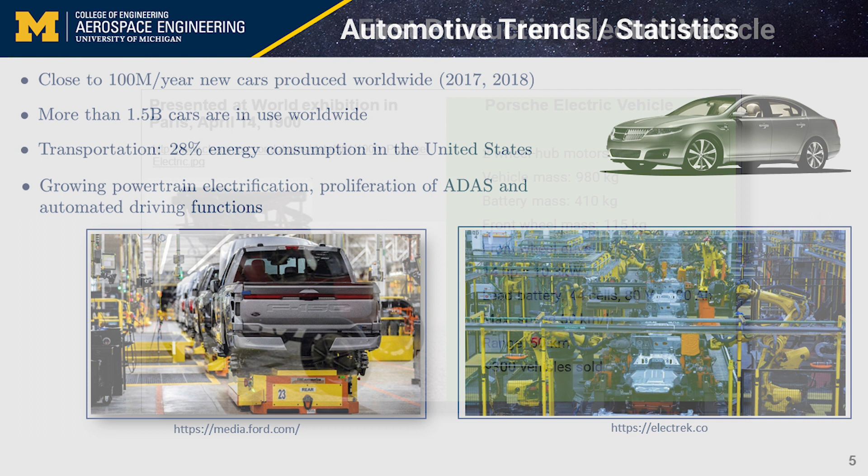And some of the trends are growing powertrain electrification, a move towards more electric vehicles, proliferation of ADAS, advanced driver assistance systems, and automated driving functions. And these photos show the Ford Lightning, which has a fully electric powertrain, being produced. So clearly, one of the trends has been towards

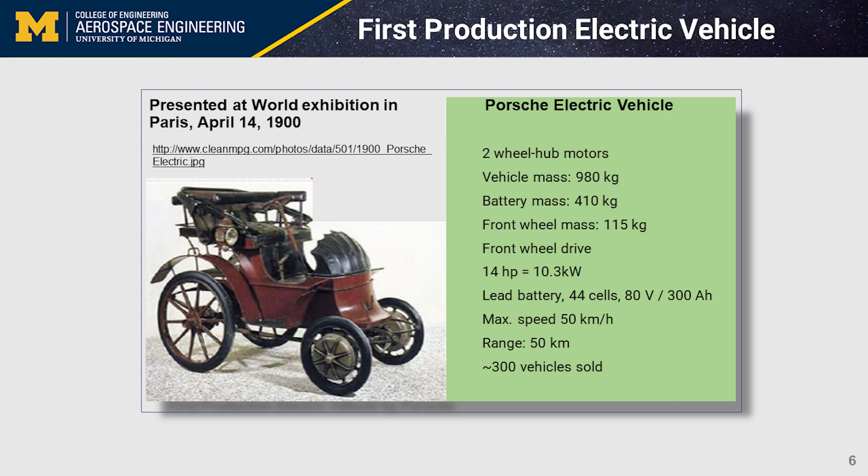electric vehicles, but what we see currently on the market is not the first electric vehicle, and in fact, the first production program goes back to somewhere around 1900 by Porsche, and that vehicle had a lead-acid battery and a fairly reasonable operating range of 50 kilometers for that time.

Now, if we fast forward more towards the present time, another notable attempt was in the 90s, and there was EV1, Electric Vehicle 1, by General Motors, and it had 170 kilometers range with nickel metal hydride batteries, which was pretty good for that time.

But as far as the product itself, it was pulled off the market, primarily because there was no customer acceptance at the time. People were not buying electric vehicles at the time, and of course that started to change more recently. And of course we recognize Tesla, but other manufacturers as well. And currently, perhaps about 10% or so of new vehicle sales would be electric vehicles.

So this is one of the Ford products, Ford Mach-E, and that has a 640 kilometers range with lithium-ion batteries. But what's also different about it, besides batteries, is that if you look closely, there is a 15.5-inch touchscreen, which is nice to have. But more importantly, there is a cloud-connected navigation.

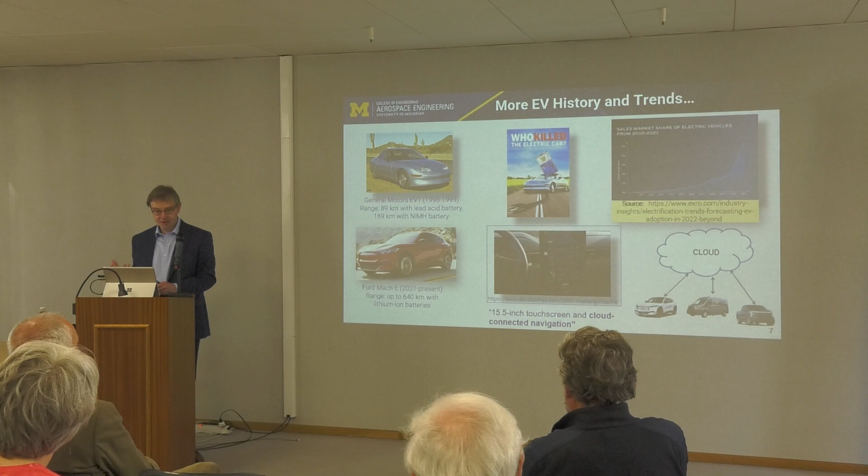And so Ford electric vehicles are all connected to the cloud. So these are connected vehicles. And the point that I'll try to make is that makes a fundamental difference in the general public being able to accept such vehicles.

So one of the key issues in accepting electric vehicles is the so-called range anxiety. About 40% of customers are concerned about electric vehicle range. Basically, the car can run out of charge in the middle of the road, because the density of charging stations is not high at the moment, but also charging takes time, so that's a concern.

Furthermore, some of the stations can have issues, for example, blocked or broken chargers, and if you look at driving in cold weather conditions, which happens in Michigan, for instance, the range can be reduced quite a bit. For example, by 30% in the case of Mach-E.

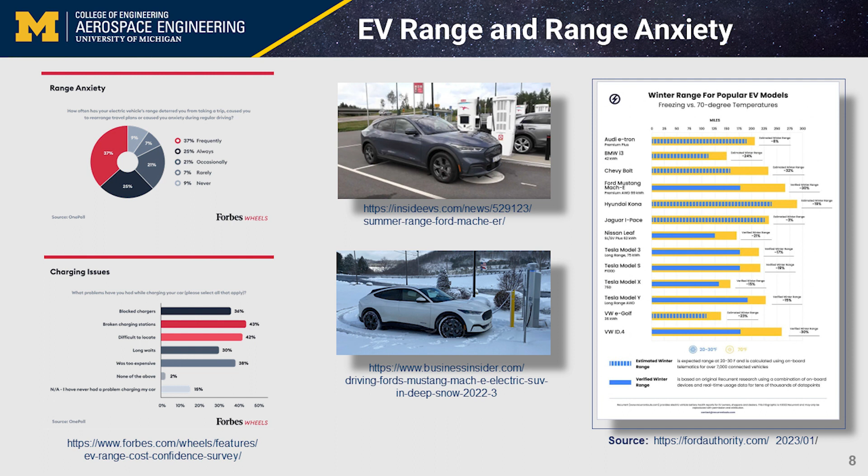So this is a type of application where cloud connectivity and generally being aware of information is really a technology that enables these vehicles. What happens is that you can learn energy consumption models for individual vehicles on the cloud, estimate and predict the range to alleviate customer range anxiety, provide range extension advisory, as well as provide routing and recharging advisory.

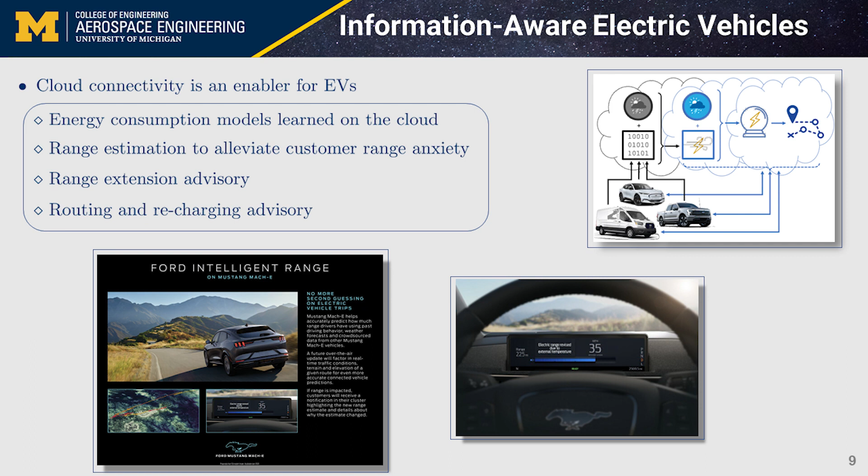And Ford is working on a number of features, such as Ford Intelligent Range, that implement this type of functionality. So our picture basically changes. If before we had an individual vehicle, and we were confined to this vehicle, now the vehicle is just a node in a larger information architecture.

We have a cloud. The cloud can have access to traffic data, weather data, as well as driving data. In principle, there is an unlimited computational resource on the cloud that you can use for model identification, optimization of energy management and eco routing, and even develop a bank of control policies that are specific to a given driving location, for example, high altitude versus normal altitude, and have those policies available on demand.

So now I'd like to say a little bit about some of the work by my students and collaborators in this area, how we try to explore the connectivity and the information available through such connectivity to enable new vehicle functions. So this is something that we call cooperative road anomaly detection.

And if you have been to Michigan, you know that the roads in Michigan have quite a few potholes. Part of it is winter and other reasons. But you see potholes like this. There are quite a few of them. And using vehicle sensors, one of the things you can do is build a detector that detects whether you hit the pothole or not.

And this particular detector is an estimator. It turns out that we don't just use something like a Kalman filter, which is more or less standard in these applications, but we use something called a jump diffusion process estimator, where the road input is represented as a sum of a Wiener process and a Poisson process.

And Poisson process in probability theory, it's something that's quite effective in modeling rare but important events, such as hitting the potholes. And using the jump diffusion estimation provides better estimation accuracy in being able to detect the potholes. So now we have these vehicles driving around and they hit the potholes.

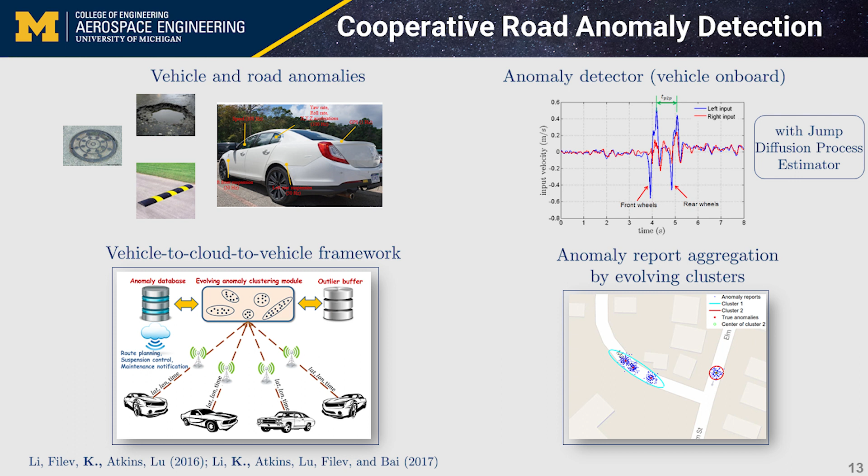And as the potholes can be repaired and disappear, once you start not receiving the reports, the weights of some of these clusters become smaller and they eventually disappear. So it's really a model where we treat the potholes by these evolving clusters as we receive the data.

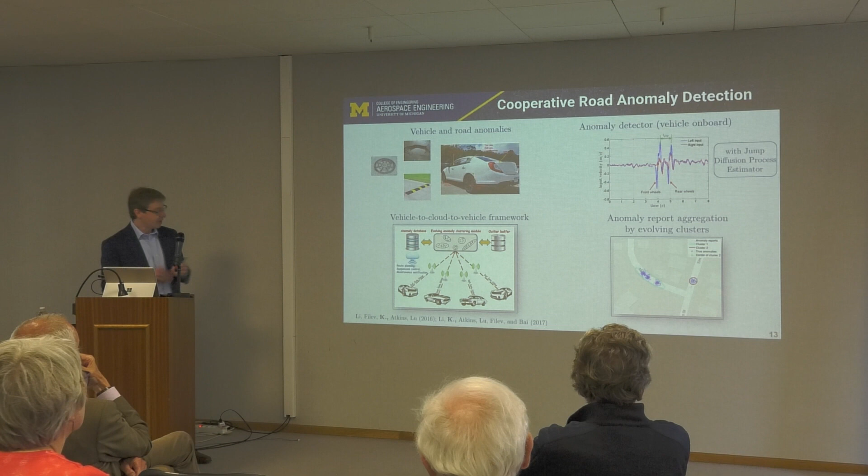Now, once you're able to learn this road anomaly information, you can convert them into route planning systems. For instance, you might say that, well, I don't want to drive along the roads with many potholes. I'd like to have a more comfortable ride. So I could create a cost function that weighs the time of travel, perhaps the energy or fuel consumption, and then the comfort index. And you can optimize this to decide on the route to follow.

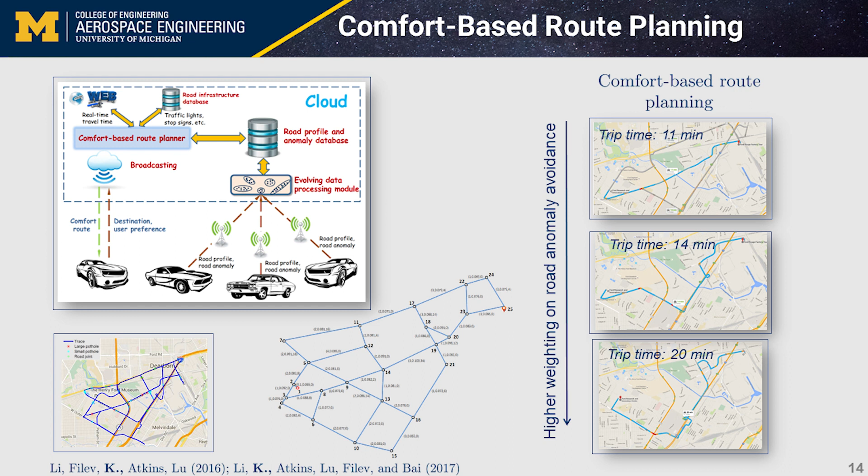And if you're willing to spend more time driving and you increase the weighting on the comfort, you could come up with different routes that are more comfortable to drive. So this is one of the uses. Here's another opportunity, what we call safety-based route planning.

The idea is that there is quite a bit of data on different accidents along different roads. And we can data mine the database of those accidents and create something called road risk index. So given a particular road segment, we can estimate how likely it is that an accident might occur over that road segment. Now, of course, it's important to also add real-time factors. For example, the weather. A piece of road might be covered by snow, or a time of day and day of the week.

And so you could create a model for the road risk index of this kind, and then you can integrate it into a route planning system. And so here's an example where we might plan a faster route of about 42 minutes. But if we increase the weighting on safety, we might actually avoid certain areas, and it will take us 2 minutes longer, but we will drive a bit differently.

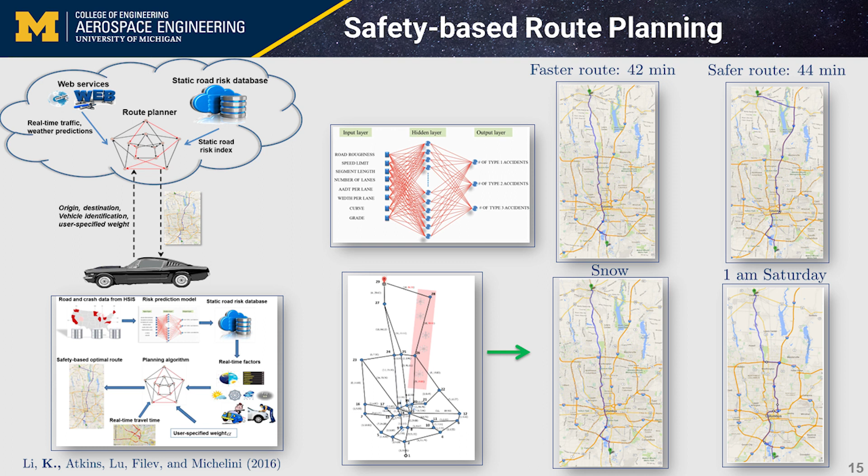Now, if we have a weather report that says that some of the roads are covered by snow, the route might also be modified. In fact, we go back to the original route. And if we drive at a particular time of day, for example, late at night, 1 a.m. Saturday, the route might change again, because at 1 a.m. Saturday, there are a lot of tired drivers on the roads.

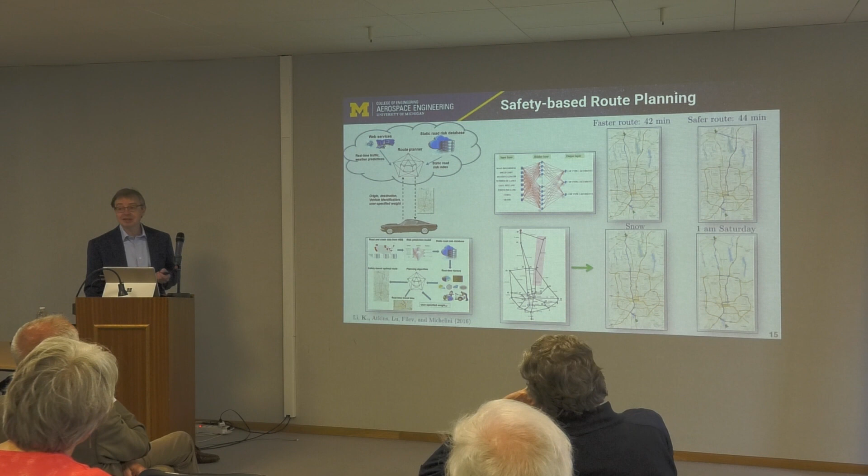It's also perhaps the time where some of the bars close, and maybe some of the people get on the road not in a good state. So we might avoid some of these areas. So hopefully this gives an idea of how this type of system can be created.

This is another possibility of using connectivity for cloud-connected vehicle diagnostics, monitoring and prognostics, as well as condition-based maintenance. Here we are talking about, for example, predicting when you have to replace brake pads or tires for the vehicle, as well as other components. And so if you look from a broader perspective on a range of these problems, typically what you have is that you have some parameters that are local, that is specific to the individual vehicle, and other parameters that are global, that are common to all vehicles.

For example, tire pressure would be individual or local to each vehicle, but something like drag coefficient would be typically common to all vehicles. Or for example, the rate of brake wear versus the kinetic energy dissipated in the brakes could also be viewed as a global parameter. So you have to somehow estimate both local and global parameters, and you have to reach the consensus on global parameters on the cloud, because the values of the global parameters have to be ultimately the same.

So how to do this? Well, it turns out that at a fundamental level, this problem is a recursive least squares problem, essentially a least squares problem to find the values of the parameters.

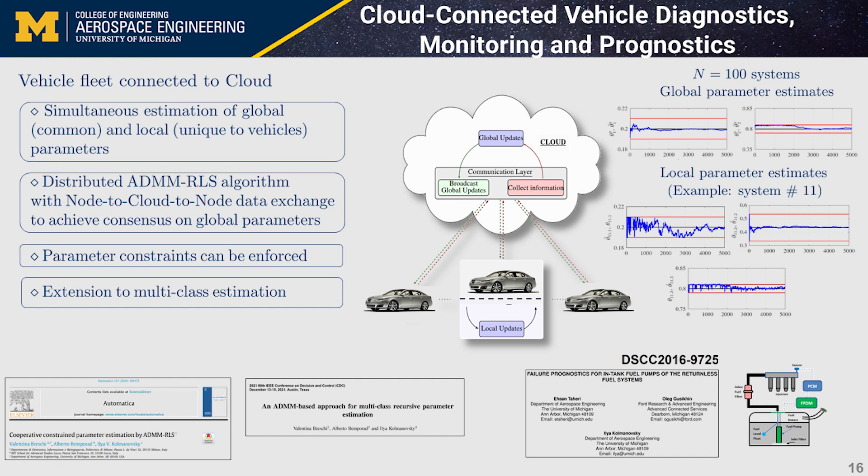Now, this has been, in a way, an area of special interest, which is what can you do if you have access to weather, either current weather or weather forecasts. And we started some of this work back in 2009, if not earlier. And the idea is that you could access the weather service from the vehicle over the internet and get some information. How can you use this information?

Well, if you can read the humidity, that can be fairly useful because there is no humidity sensor on a vehicle. And you can use it to adjust engine spark timing, as well as improve air-to-fuel ratio sensor accuracy. And that's good because it can improve fuel efficiency a bit, as well as reduce emissions a bit as well.

Ambient pressure is something that you can use to save the cost. You can remove one of the sensors in the vehicle, barometric pressure sensor, or you can use it for its diagnostics. Now, the other thing that you can do is to access wind speed and wind direction. But at the time that we looked at it, we could read it in a car, but these measurements were only at the location of the weather station. So they were not at the location of the vehicle.

And so we had to extrapolate to the location of the vehicle, and that was a very hard problem. But the situation has changed, and in more recent years, some of the weather services are becoming increasingly sophisticated, and they do this extrapolation for you. So now you can literally query the weather service with GPS coordinates and time, and it will give you either current or predicted information, for example, about wind speed and wind direction. And so that can be useful.

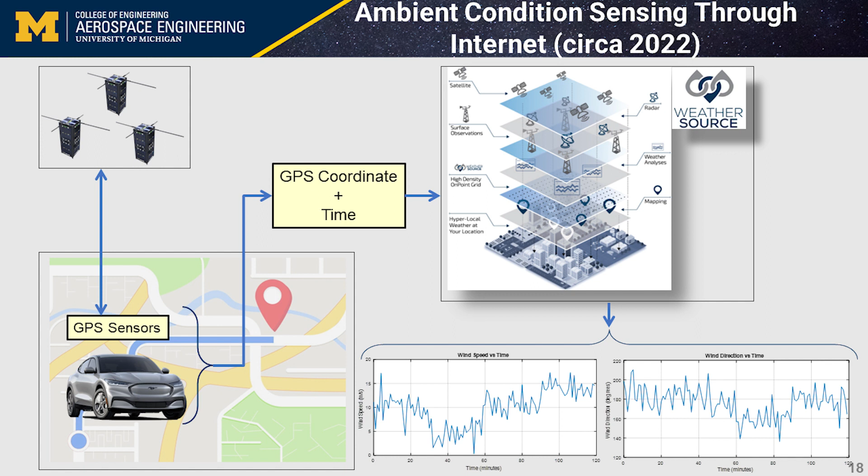For instance, you can try to correct the range estimate or range forecast, accounting for wind speed and direction. And so the idea here would be, if you have a route and you learn nominal energy consumption models on a cloud, and you also can read wind speed and direction, you can define certain correction factors that you can also learn in principle and correct the range estimate.

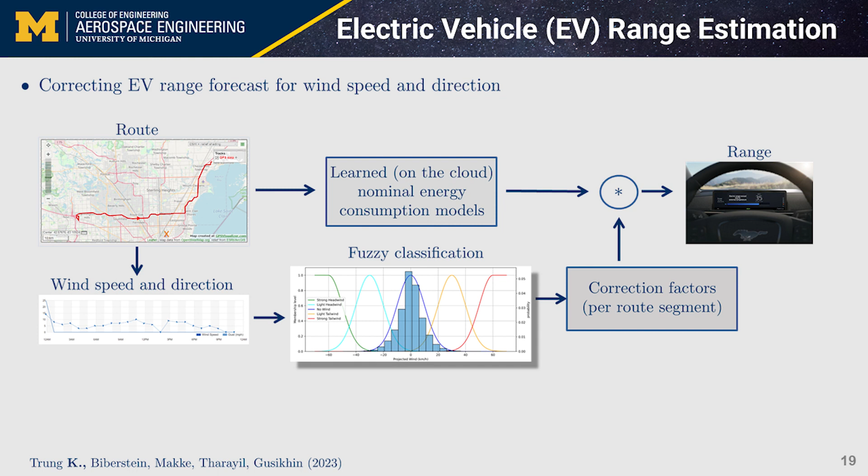Now, this is not necessarily straightforward to do because there are many uncertainties in this forecast. In particular, you can't reliably predict how the vehicle is going to accelerate in the future. So predicting the vehicle trace is actually quite involved. But certainly, if you have strong tailwind or strong headwind, those types of corrections can be quite useful.

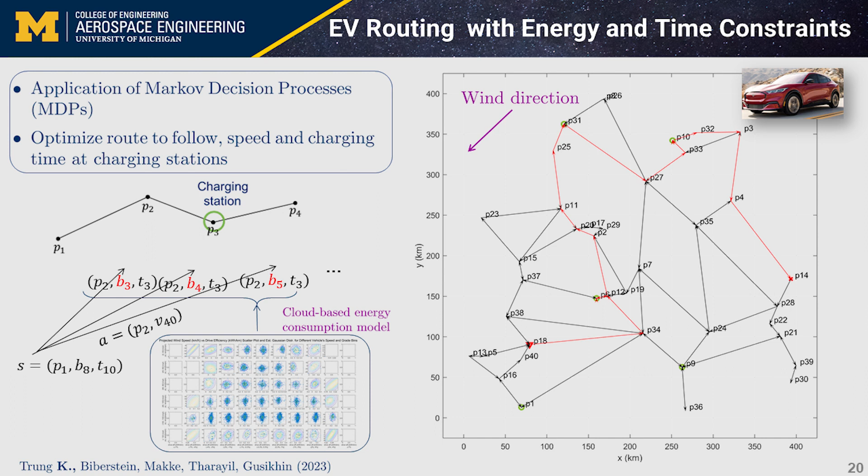And then you can implement this in terms of various types of routing schemes. For example, decide on route to follow, vehicle speed along each segment, and charging time at charging stations. We use dynamic programming to solve this type of problem, but there is a variety of other techniques that can be used. So I hope that it's fairly clear there are many opportunities to implement new vehicle functions by exploiting the cloud.

What about connectivity to, for example, traffic lights or connectivity to other infrastructure? So it turns out that you can also do a few things here at powertrain level. And this is an example where we looked at a vehicle with turbocharged gasoline engine and dual clutch transmission. And so the dilemma here is that you're trying to start from idle and accelerate the vehicle as fast as possible. So you are in a Fiesta next to a Ferrari and you try to accelerate faster than the Ferrari, roughly speaking. So what can you do?

So the dilemma here is when to engage the clutch. If you engage the clutch early, then the engine has to accelerate and drag full vehicle inertia with it, right? So that's going to be slow. But if you delay the clutch engagement, then the engine will accelerate fast and go to higher speed from which you can perform the engagement. But the trouble is that during this period, basically the vehicle doesn't respond, so you have hesitation.

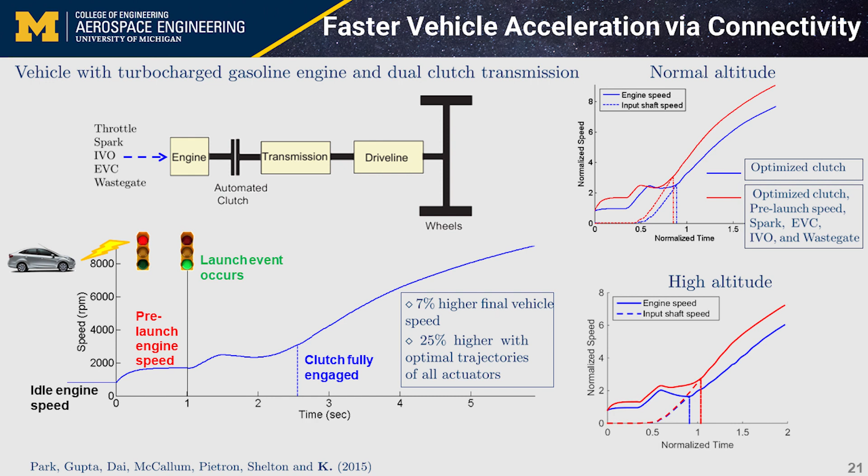So how can communication help? Well, if you have a preview that the light is going to turn green and you don't have another vehicle up front, you can increase the engine speed. So you could go to higher engine speed before the actual launch event starts. Furthermore, you can preposition the other engine actuators for faster launch, and in fact, you can try to optimize their trajectory during launch. And it turns out that just with a preview, just through the communication, you can get 7% higher final vehicle speed.

But then if you can preposition and control engine actuators during launch, together with a clutch, of course, you get about 25% higher vehicle speed. So that's interesting.

The other opportunity is if you're operating in an automated parking scenario or in automated driving corridors, you have infrastructure-based sensors. So not all sensors have to be on a vehicle. Some sensors can be integrated with the infrastructure. For example, within a parking lot, you could have cameras, and you can fuse vehicle measurements together with infrastructure measurements to create estimates that you need and localize your vehicle.

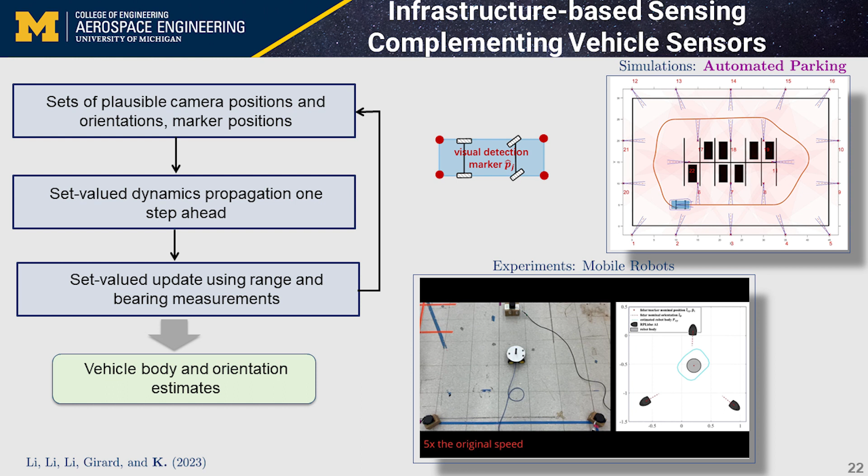Here we do some experimentation with estimation algorithms that we use on mobile robots, but we have simulation results for vehicles doing automated parking. The specific classes of algorithms that we exploited for estimation are not conventional statistical Kalman filter based; we use deterministic algorithms called set membership estimation. These are deterministic algorithms, and they have certain advantages for this kind of application. So hopefully this gave a few examples of how we can exploit the connectivity.

What I'd like to do next is talk a bit about computing and computations. About 5 years after starting at Ford, around the year 2000, we had to work with very limited onboard computing power. A typical powertrain control module had a clock speed of about 30 megahertz, about 40 kilobytes of RAM, and 1 megabyte of ROM. The processor was already 32-bit floating point, and that was enough to do basic control of the engine and transmission and meet emission regulations.

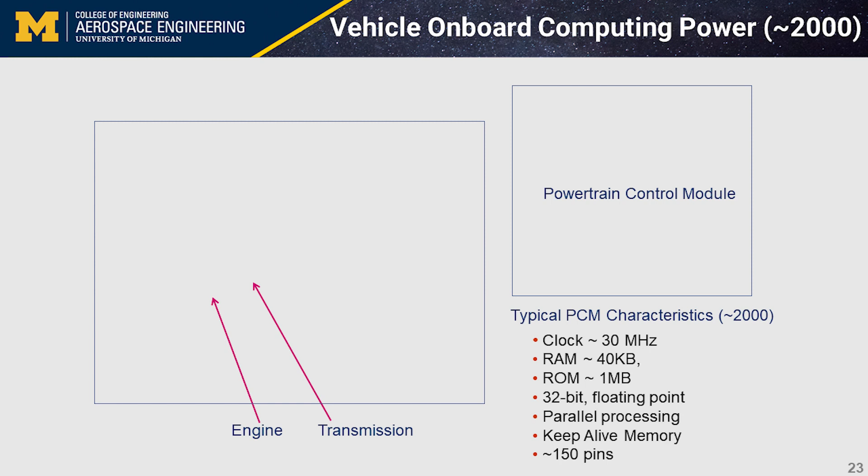But of course, you were limited in what you could do with advanced algorithms that require computing power. More recently there has been a growth in onboard computing power. The powertrain control module clock speed and memory have increased, perhaps by an order of magnitude. Multi-core processors are being used. The vehicle has several dozen modules and processors interconnected over several vehicle networks. In fact, the infotainment system alone packs very significant computing power.

And systems that implement advanced driver assistance as well as automated driving are often characterized as computers on wheels, mobile computing platforms. So you have significantly more computing power available, and that creates opportunities for implementation of more advanced algorithms developed in the literature. One interesting opportunity has been the implementation of model predictive control, an area of research for my group, as well as, I think, Professor Garone's group here at ULB.

The basic idea of model predictive control is that you use a model to predict the response into the future. You plan your trajectory into the future, and then use an optimization algorithm to optimize this trajectory with respect to control actions you can take. So it's essentially trajectory optimization into the future. But you only apply an initial portion of the trajectory, and then you repeat this process: you look further into the future over the same horizon, compute the new trajectory, apply the first move, and so on. And you always update your model using the most recent sensor measurements.

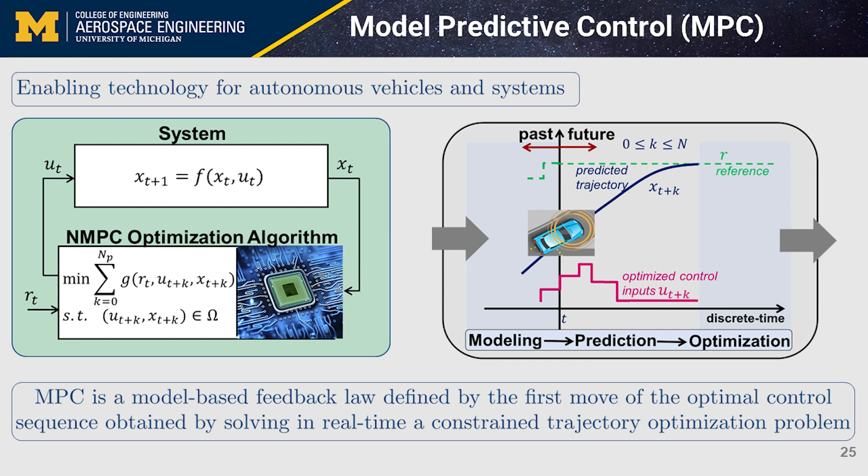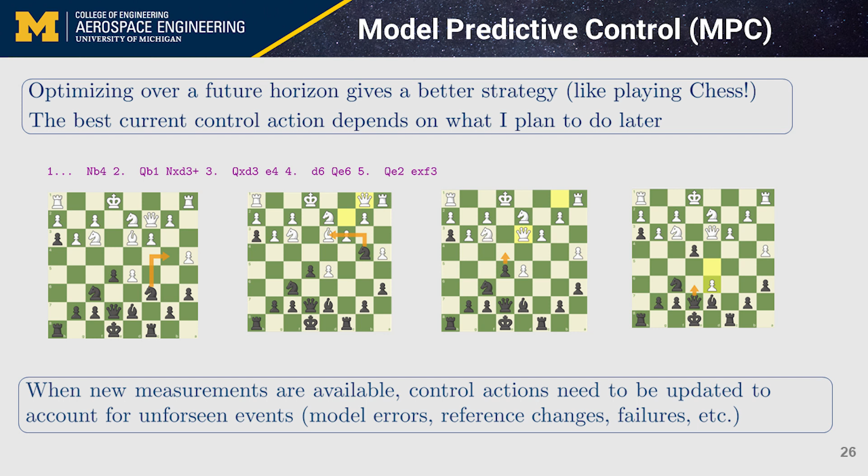This is another way to think about model predictive control. Sometimes people compare it to playing chess because optimizing over a future horizon of several moves gives you a better strategy. The best current control action would depend on what one plans to do later. And of course, when new measurements are available, one sees what the opponent does in terms of the moves. You can replan that trajectory of moves into the future.

So model predictive control has a long history in control applications. It actually emerged in the late 60s in academia and in the late 70s in industry, but not in the automotive industry. It emerged in the chemical process industry and has been very successful. There has been also extensive research on theoretical and computational aspects of model predictive control in the academic community.

And over the last 20 years, there has been increasing interest also in the automotive industry that's enabled by growth in computing power. And there have been recent successes in terms of actual production implementation by General Motors, and they have implemented it for engine control and transmission control. There's a number of other manufacturers that are pursuing this type of methods for their applications.

Now, I'd like to tell you a little bit about some of the work that we have done applying MPC, and this is in the area of reducing engine emissions. And here we've been working on diesel engines. Diesel engines were once popular for passenger cars, but they're being phased out. Nevertheless, they're not dead yet because larger vehicles, commercial heavy vehicles in particular, predominantly use diesels, and so the emission reduction is important. Also, some of the efficient airplanes use diesel engines, as it turns out.

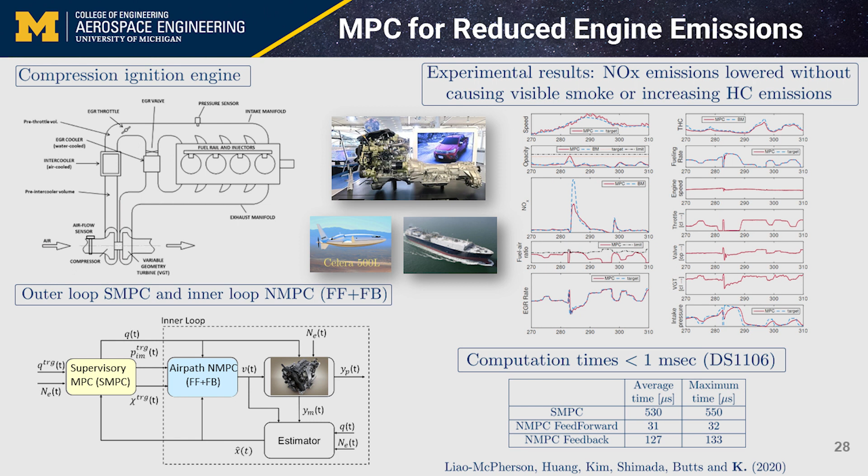We were fairly pleased with the results. And if we look at the computational times, we've been able to run all of these three MPC controllers under 1 millisecond. This is a dSPACE rapid prototyping system, but the execution is fairly fast after the optimization steps that we took.

Okay, so now I'd like to turn to the third topic in this presentation, which is autonomy and autonomous vehicles, automated driving. And here we refer to vehicles that use advanced sensors, camera, radar, LiDAR, GPS, IMU, use advanced perception systems to understand what happens with them and also with the traffic around them, as well as pedestrians. Planning, both strategic and tactical planning in terms of route, path, and the actual trajectory, which is then commanded to vehicle controls and powertrain controls.

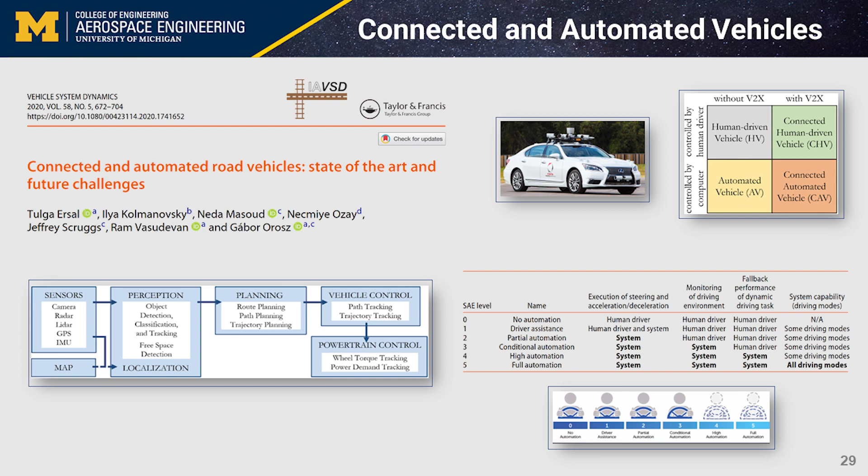By the way, there is a possibility to integrate connectivity and automation together. In this case, we have a connected automated vehicle, but you have other variants where you only have a connected human-driven vehicle or an automated vehicle without connectivity. Generally, you have levels of automation, from level 0, which is no automation, to level 5, full automation, and then there's everything in between.

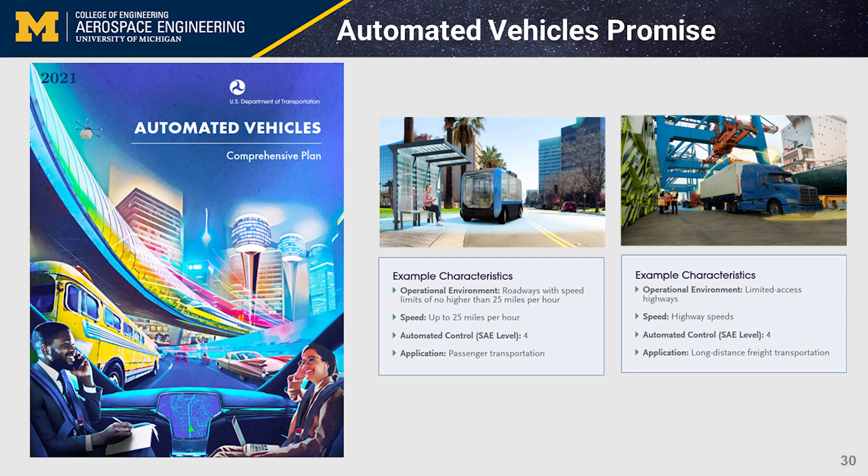Automated vehicles, of course, have significant societal promise, particularly enabling people who are not able to drive to have an option for transportation. And there are a number of scenarios which are attractive in terms of level 4 automation. For instance, low-speed shuttles or freight transportation. There have been some successes, of course, with level 2 and some level 3 vehicles.

But for high level of automation, perhaps there is a growing realization that there remain quite a number of challenges. But there are quite a number of functions that connected and automated vehicles allow, in particular in the area of safety, environment, and mobility. And I'd like to mention that some of the challenges in enabling high level of automation actually lie in the area of correctly accounting for human interactions.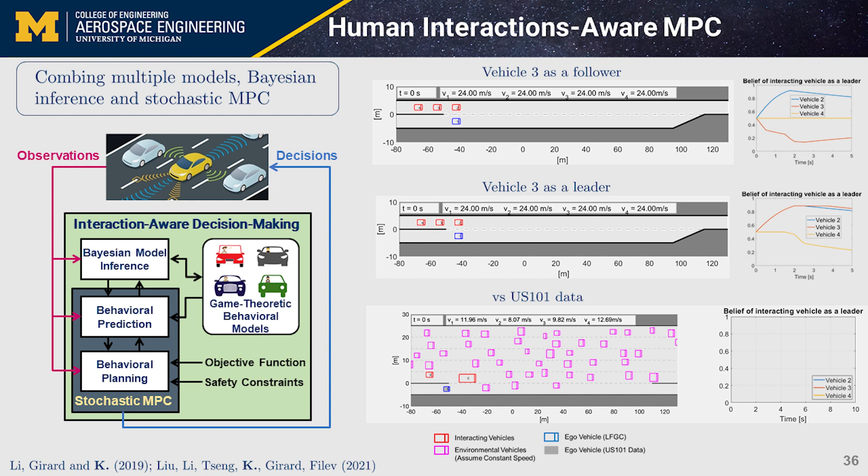Now, in my next lecture, I will discuss this a bit more in terms of the type of solutions that we are developing. But essentially, to model some of these interactions, we use models based on game theory. We use Bayesian inference to try to understand which model each of the surrounding vehicles follows, and then we use something called stochastic model predictive control, scenario-based model predictive control, to then optimize our decisions.

We have also looked, maybe not quite a bit, at problems in integrating perception, learning, and control, which is very important for this type of applications. This is an example where we looked at end-to-end learning, where we literally look at camera images, and we essentially do the whole chain towards the driving actions using a combination of machine learning and reinforcement learning type of techniques.

How much time do I have? Just to, I know that. Okay, very good.

So what I'd like to do for today's talk is talk a little bit about some of the opportunities in automated vehicles and what we call eco-driving. Essentially the idea is, through automation, to achieve some energy consumption reduction benefits or fuel reduction benefits. This is a survey article that projects something in the order of 20% benefit in terms of eco-driving.

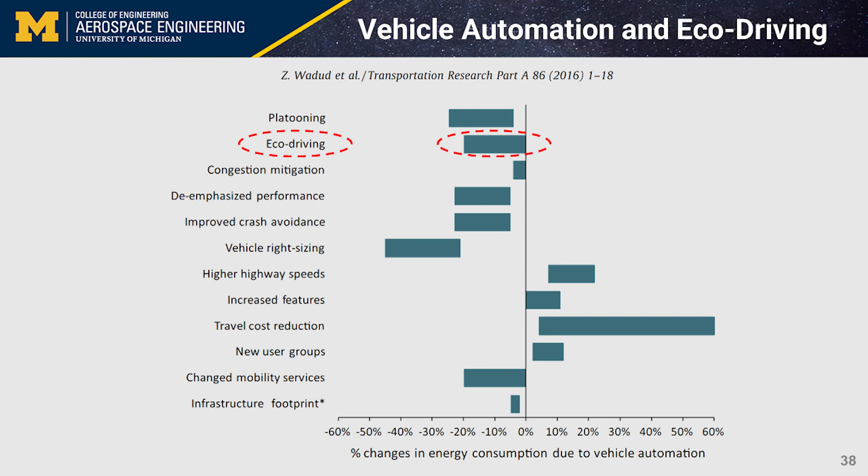There are multiple ways you can enable these savings, but before I talk about some of the work that we've done in this area, I want to mention that there are also energy costs of automated vehicles, because if you look at some of the advanced sensors as well as the computers on board, it actually takes electrical power to drive them. And some of the estimates done in the past say it could be up to 5 kilowatts to actually drive all of this.

And so the fuel economy benefits of connected and automated vehicles could be significantly offset by these loads and energy losses, in particular the ones needed to cool advanced electronics and onboard computers. So one has to look at all the trade-offs involved.

Now, ARPA-E is a federal agency in the U.S. which looks after energy innovations. It had a program called NextCar that started in about 2017. The goal of the program is to achieve an additional 20% reduction in energy consumption for future connected and automated vehicles. A number of projects have been selected for funding, including the project I participated in on the University of Michigan side, which has to do with integrated vehicle power and thermal management. The interesting aspect that I think appealed to the sponsors is that we looked at thermal management aspects for automated driving.

Now, what did we do when we started on the project? Well, one of the first things we did was to purchase a vehicle, a Toyota Prius, with these project funds, and we started to drive it around and see what happens with fuel consumption in particular. It's a hybrid electric vehicle. If we turn the air conditioning on and off, as you can see, if you turn the air conditioning on, there is quite a significant drop in fuel economy. And a similar situation happens for heating.

And so you look at these numbers and they're quite large, and you think that there is a significant benefit. But it turns out the story is very complicated because, while these numbers are large, you can at best only get a fraction of that benefit, because you can't just tell people don't turn on the AC, or just buy a warm coat and don't turn on the heating.

That's not an option. So you still have to maintain cabin temperature, and you also have to maintain the other component that's very important to manage the temperature of, which is a battery, of course. So you have to maintain those. And so certainly it's not that you're going to get 50% improvement here for sure. Now, yeah.

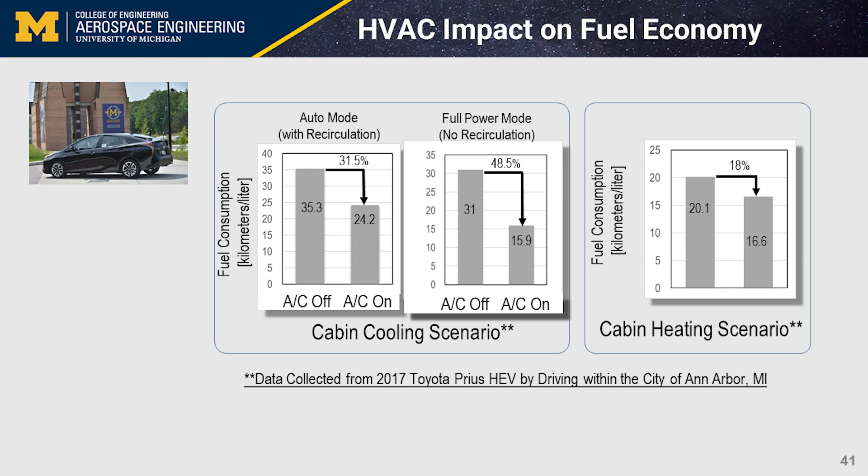So there is a number of issues going after that benefit. And one of the significant issues is that thermal processes are slow. So if you look at something like engine power, it changes fast. But if you look at, for example, engine coolant temperature, and you probably know from your own vehicles, that doesn't change very fast. So that means that you have to worry about processes that are evolving over multiple time scales. And so that creates complication for control.

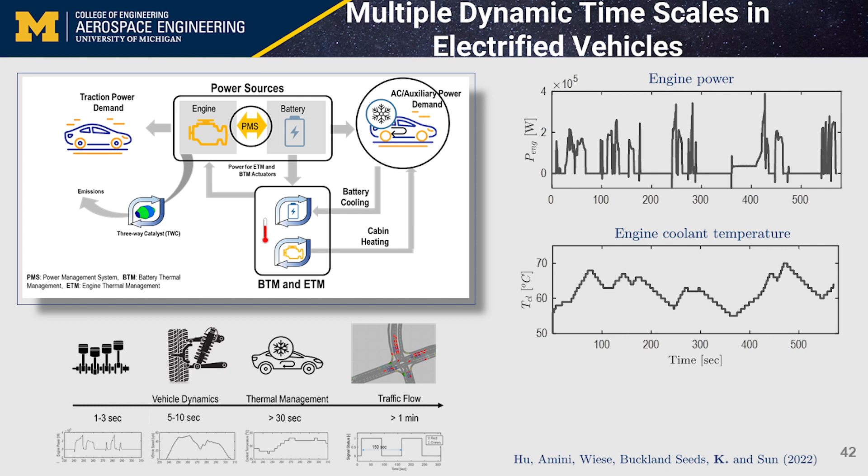And just as one example, if we are trying to avoid battery temperature constraint violation in a battery electric vehicle, how could it happen? Well, you accelerate to high speed, and if you don't start pre-cooling, you might actually exceed that limit. And so you kind of need to start pre-cooling fairly far in advance. So if you see this acceleration coming not far enough in advance, you may not be able to pre-cool the battery.

So there's a couple of challenges of dealing with long prediction horizons. One of them is that if you try to do optimization over a long horizon, you incur high computational cost. And the second is that to be able to predict the vehicle speed over a long horizon, that's a complicated matter. You incur very large forecast uncertainty. So we've been working on various methods to predict the forecast, and I'll show this in a little bit more detail later if I have time.

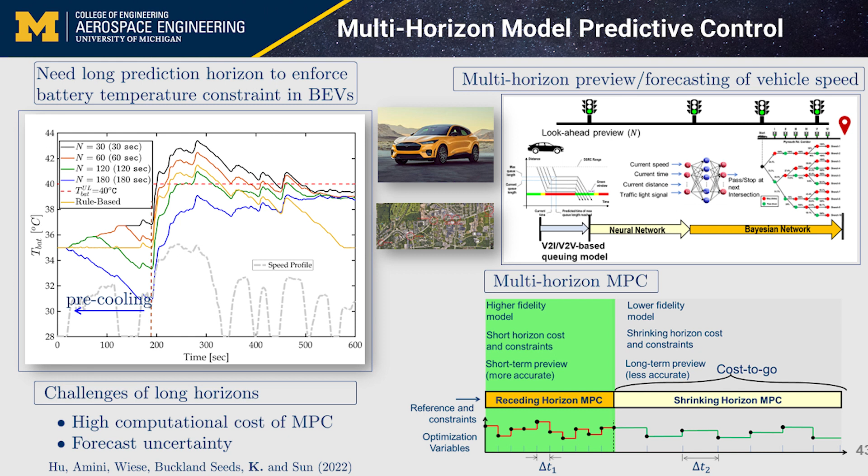And also we have certain strategies for how we might implement model predictive control over these longer horizons. We call this multi-horizon MPC, where we might have a short receding horizon phase, where we use better, more accurate models, and then a longer shrinking horizon phase, where the models may be cruder, and essentially we use this phase to form a cost to go for the receding horizon MPC, and these types of tricks are helpful.

So as I still have some time, maybe let me describe some of the work that we've done along these lines, in particular for eco heating. This is for hybrid electric vehicles, so you still have an engine. An engine is used as a source of heat for the cabin here. But in a hybrid powertrain, you can also shut off the engine.

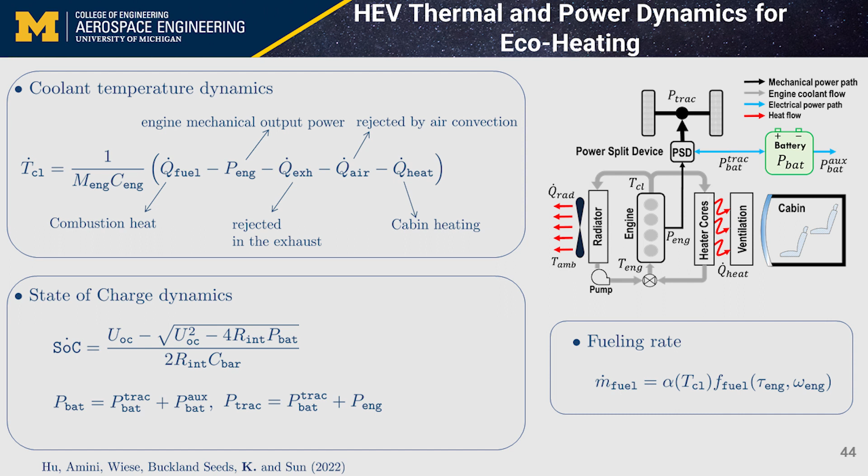And if you want to look at simple models for such a powertrain, of course, you can develop something significantly higher fidelity. But essentially, you can look at the model for the coolant temperature of the engine, which again is a source for the cabin heat. This is essentially the first law of thermodynamics, and then state of charge dynamics for the battery, as well as power balance for battery power and engine power, which add up to create traction power. Now, what is the opportunity there?

So if the coolant temperature drops low, then this diminishes the source for cabin heating, and the engine has to be turned on and be idling to provide heat. So that's a problem. And so what you can do as an eco-heating approach is to foresee and avoid such an inefficient operation through model-based prediction.

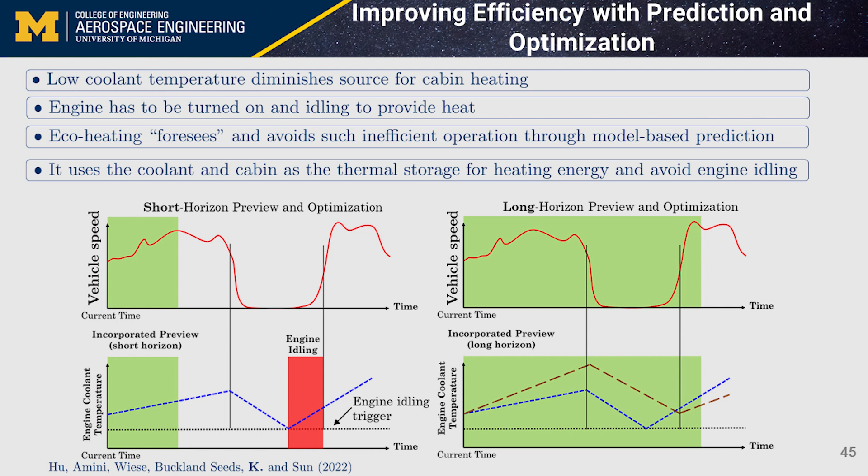Now, when we test, we don't test on the actual road. We replicate this drive on some side roads where there are no vehicles, so we don't interfere with the traffic. And so this is how Michigan looks during winter in some of the side roads, and this is our test vehicle in the process of the testing. But indeed, for this type of drives, we can realize a fuel saving of something in the order of 4.7%, which is significant; percent savings in automotive vehicles are already significant. If you can even save 1% of fuel, that's significant in those applications. And again, this is done by this eco-heating strategy.

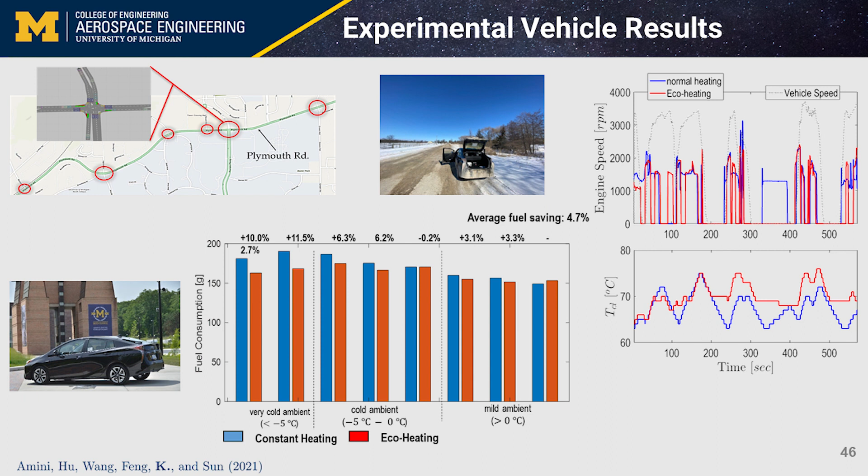Now, of course, you realize that the central aspect to being able to do things like that is being able to predict the vehicle speed over a sufficiently long horizon. And so that's a challenge. Road grade and wind power as well, but the vehicle speed is the most difficult thing to predict because you are driving in traffic, right? And so we've looked at a variety of ways to do this. For the short term, using some of the queuing models, in particular shockwave profile models developed in literature. They're implemented in some of our systems.

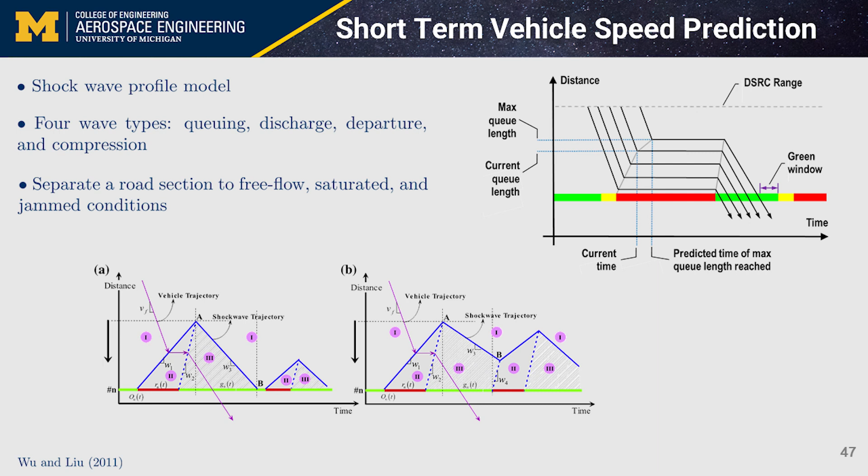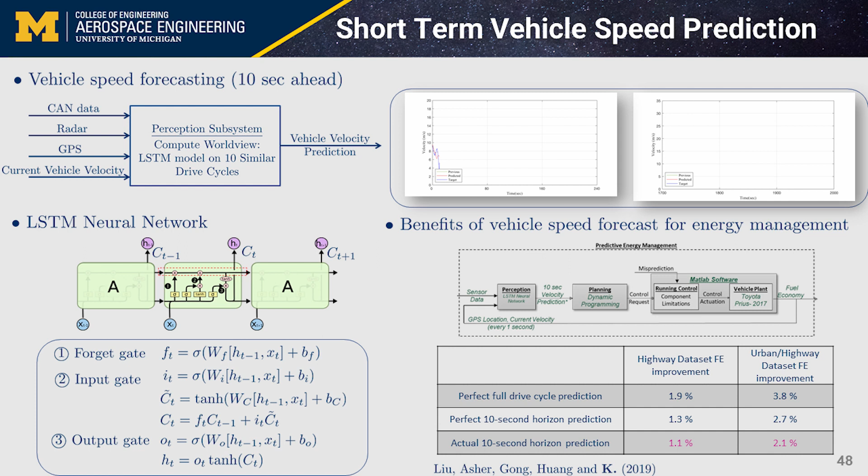We also looked at machine learning approaches, for example, using long short-term memory neural networks with which we can predict the vehicle speed 10 seconds in advance. And here we are using, in addition to conventional historical data and vehicle velocity measurements, advanced sensors, in particular radar and a few others. And even without thermal management, just at the purely power level management, the short-term prediction of the vehicle speed already provides some benefits.

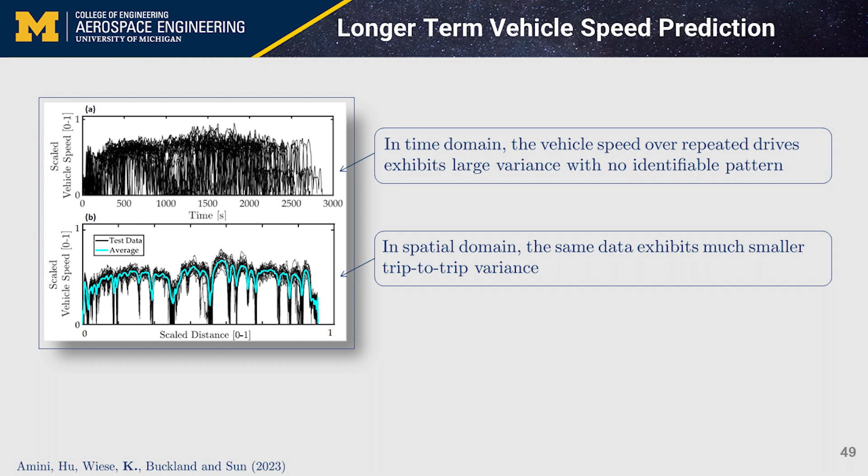Now, for the medium-term vehicle speed forecasts, it turns out that we found it very useful to use machine learning methods, in particular neural networks. And for medium-term forecasts, the key component to predict is whether or not we are going to stop at the next traffic light. Because if we are going to pass through the traffic light, we have historical data, we have speed limits, and we can compose a reasonable prediction of what the vehicle speed is going to be. But the difficult thing to predict is, are we going to pass through the traffic light or not?

And there are multiple dimensions to this problem, but assuming that the traffic lights are not adaptive, so they have stationary phasing and timing, we can train neural networks that are able to predict whether we are going to pass or stop at the next traffic light, and that allows us to inform the vehicle speed forecast.

For longer term, even longer term vehicle speed prediction, we've been looking at methods that involve Bayesian networks. So the idea would be to think about this scenario where you have a road with multiple traffic lights as an interconnection of nodes, and red means that you stop, and green means that you pass. You can create a number of scenarios of what can happen to vehicles. Some of them might get stuck, some of them might go through. And then based on historical data, you could actually estimate the probabilities or percentages of the vehicles following each branch.

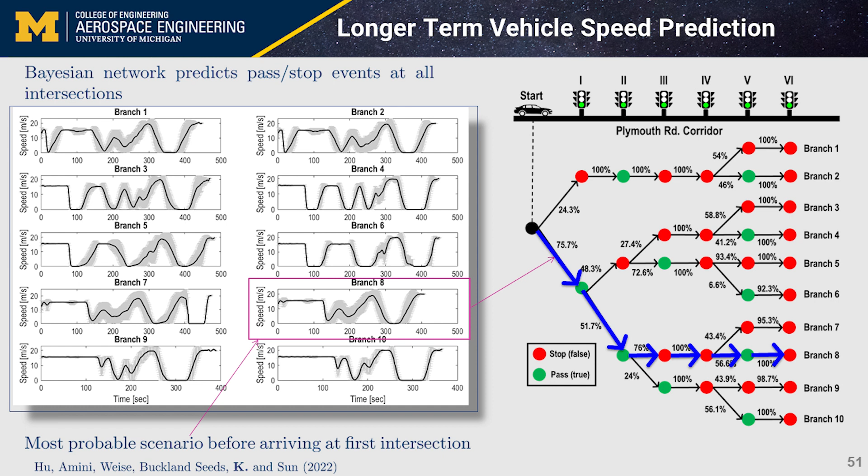Yes. So here I think we had multiple vehicles. I would have to look it up. If you send me an email, I can send you the paper.

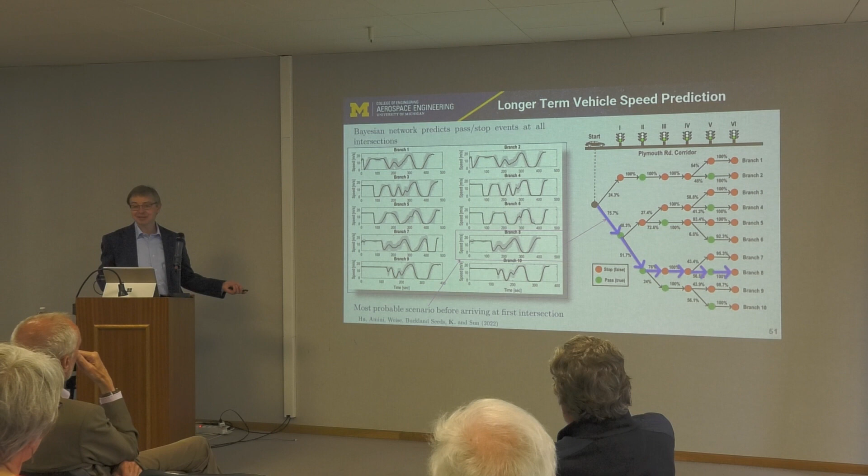Anyway, we've tried to understand what the benefits are of being able to accurately predict the speed over the short term, medium term, and long term, and how closely we can come to the results. And the reason you see the distributions here is because we have multiple simulated vehicles in VISSIM. That's a modeling package used in this type of application. We have them going through these types of scenarios, and so we end up with a distribution. This is done not on real vehicles but on simulated vehicles.

But essentially, the closer we are to zero, the better the results. And so, indeed, there is value in doing these types of predictions the best we can. But of course, it still remains a challenging problem. Yes. It would be straightforward for the traffic lights to inform the car how long they will stay green. Yes. In this work, we assumed that the vehicle is automated but not connected.

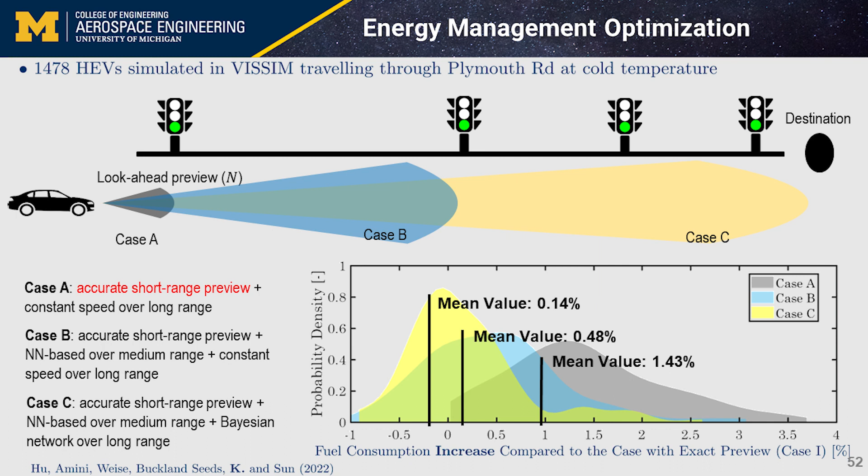How am I doing on time?

Please. Just an idea. If you have public transportation and you are the owner of this public transportation, but you are also the owner of the red lights, then maybe part of the vehicles are fully connected because it's public transportation, and you can manage the whole thing for your public transportation. I know that in Brussels there was some communication between the bus and the red light, but just for traffic flow, not for energy consumption. But maybe there are possibilities there. Yeah, absolutely. Because then you own the whole infrastructure, you own the buses.

Yeah, I think this is an excellent comment, and many of these questions don't exist solely in the technology domain, right? There's a policy and societal domain that is heavily baked into some of this. I'm just describing some of the things we've done. So,

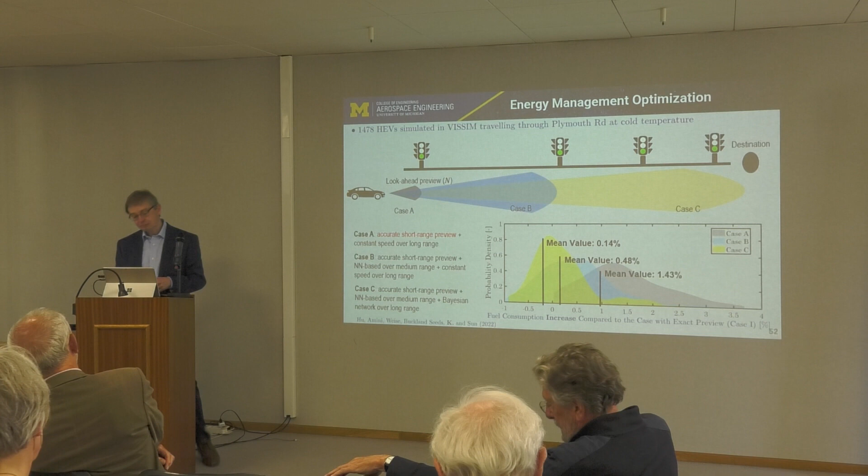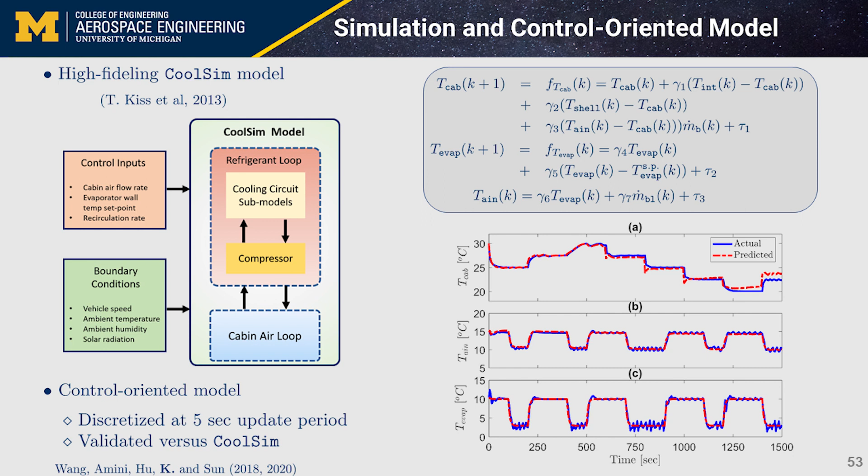very quickly, looking at the cooling side and what we try to do about the energy consumption of the air conditioning, and some ideas we try to exploit there. In that case, we started using a high-fidelity model called CoolSim. It's available from the national labs in the US. And then we tried to derive a control-oriented model, which just represents the cabin temperature, evaporator temperature, and air intake temperature. Those are not very complicated models compared to high-fidelity modeling of the systems, but that's something we try to identify and use for control. And of course, we compare this to data from high-fidelity models as well as from vehicles.

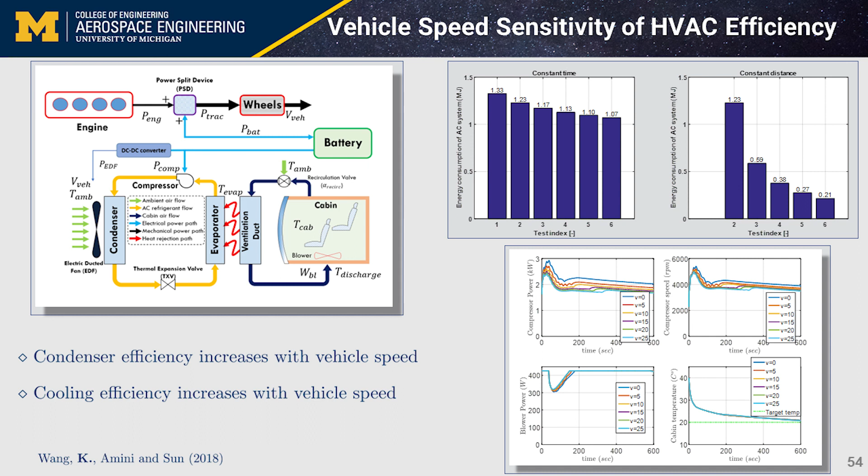And then we started to look at a number of ideas. With normal cooling, the driver sets a set point for the cabin temperature, and then we control to that temperature. If we want to do eco cooling, one of the things we might try is to define some kind of a corridor for that temperature and let the temperature vary a bit. The idea is that we cool a bit more when the vehicle velocity is higher, and when the vehicle velocity drops, for example when we idle, we let the temperature rise a bit. So that's kind of an idea. And if you're able to do it, then we can try to improve the efficiency.

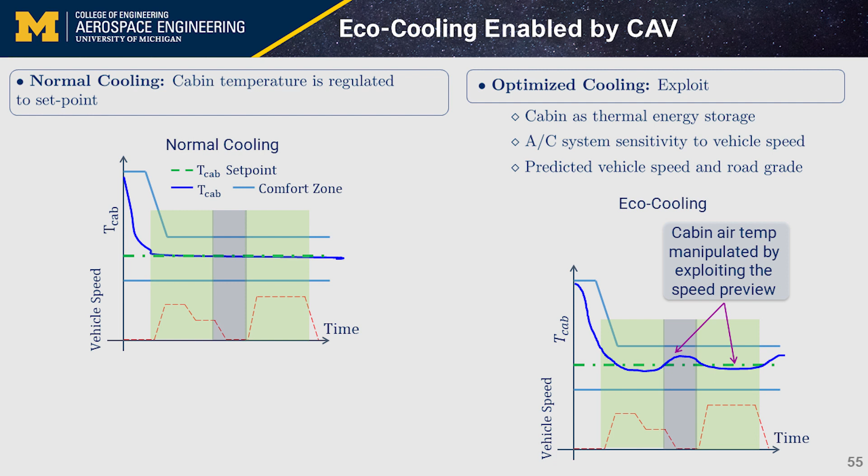And so we looked at these kinds of strategies for operating the AC. In fact, this eco-cooling, we also combine it with eco-driving, where we optimize the vehicle speed profile using the queuing dynamics at intersection models. And so we do this sequentially.

We first optimize the vehicle speed profile. We then optimize the HVAC, the AC operation, and then that gives us some ideas about what our power required to drive the compressor and blower is. And then the final stage is that we optimize the power split between engine and battery. Again, this is in a hybrid electric vehicle.

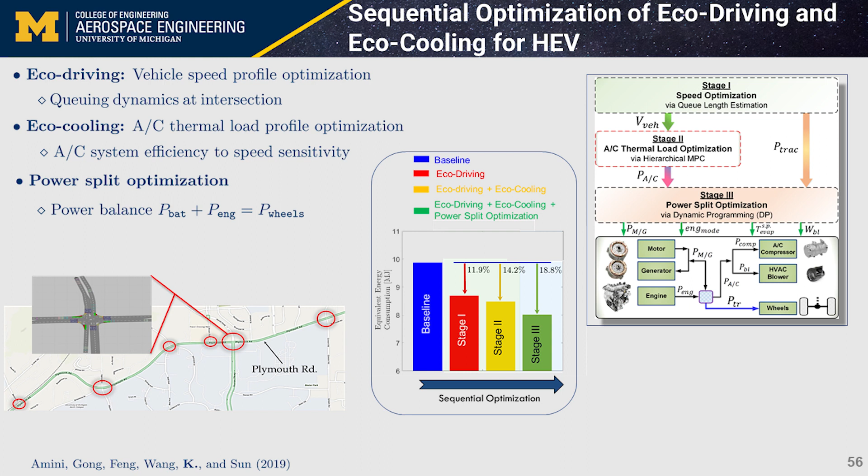And so over the same kind of stretch of Plymouth Road that we've been working on, this diagram sort of shows what we see in terms of improvements. At least for this particular drive on the models, we see that if we optimize vehicle speed, we get about 11.9%, and then this benefit grows to 14.2% improvement, and all the way to 18.8% after power split optimization.

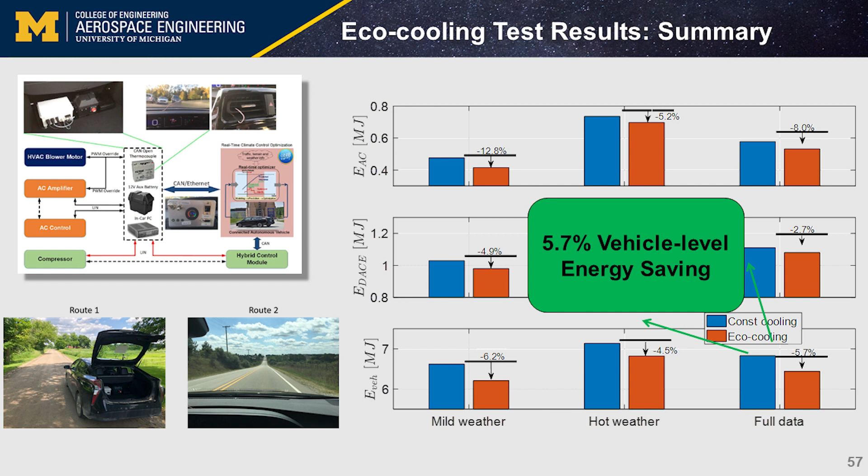We did do vehicle tests with that system, and the vehicle looks cleaner because we do testing in the summer. Again, we do it on side roads, and we actually saw, at a vehicle level, about 5.7% benefit exploiting the strategies.

And this is unfortunate. When I was working in an automotive company, you have access to what's going on inside the vehicle. But if you buy the vehicle, then you can only do limited things. You can instrument it with sensors, and you can certainly override things like a cabin temperature set point or operation of the blower, right? But you can't modify the in-vehicle software. So we were kind of limited in what we could do.

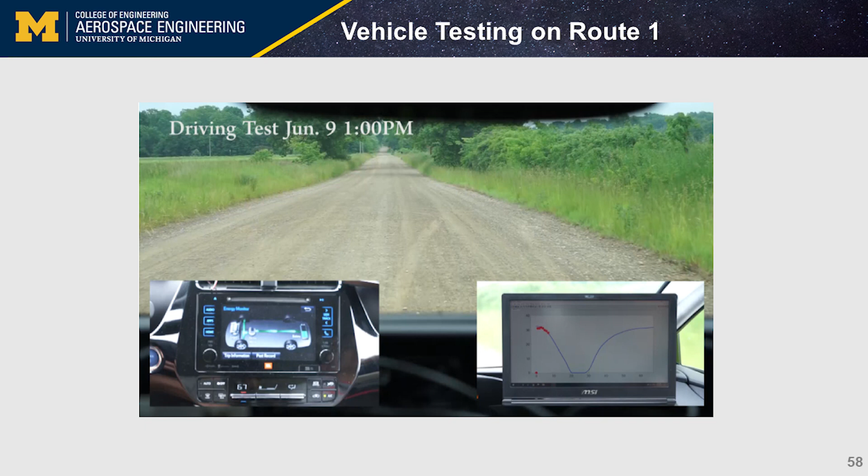And here, for example, the optimized vehicle speed profile was followed by the driver, and then the optimized cabin temperature set point and the blower operation we were able to control through the laptop computer.

Now, of course, if you come to think about cabin temperature management, it's not just about the temperature, right? It's really about thermal comfort. And that combines not just the temperature, but also airflow over the body. And you could argue that you have to develop a bit more complex comfort models that are linked to temperature, but also account for other things. We've done some work in this area as well,

using the predicted mean vote model for occupant thermal comfort. And these types of models can also be integrated in model predictive control, and you can look at the benefits that they provide, and so on and so forth.

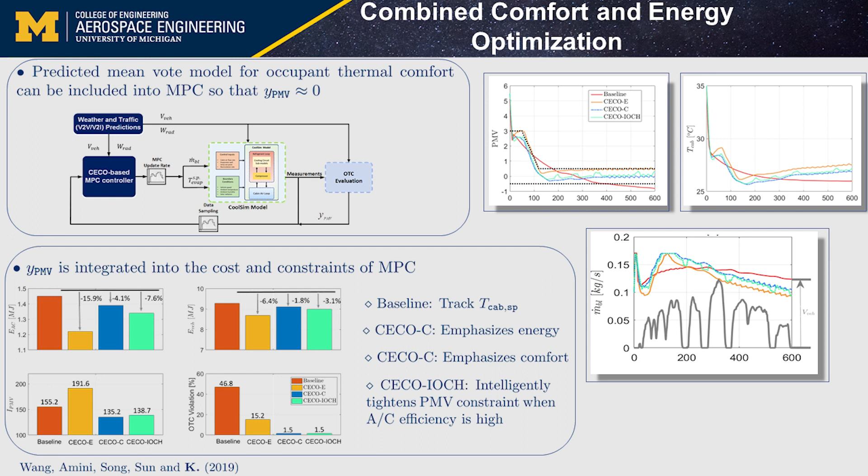That actually brings me to the end of my talk, and I just summarized a few closing thoughts that I wanted to leave everyone with. First, I think that automotive engineering has become as much about algorithms and software as hardware. And so for those of us, including myself, who work in this area, that's exciting. Control has often been characterized as a hidden technology, not really visible at a customer level, but that has been changing, and that, I think, is important.

There are many exciting developments exploiting vehicle connectivity, automation, information, data, control software, advances in computing and artificial intelligence, and there are also many opportunities for research. Now, which of these ideas ultimately make it to real products?

What I like to tell myself is that automotive engineering is about a couple of things. One of them is low cost, fundamentally. The other one is high reliability, right? You cannot have quality problems. And then development and deployment processes are very important. So essentially, with something that works but is difficult to explain, there is a difficulty in adopting it.